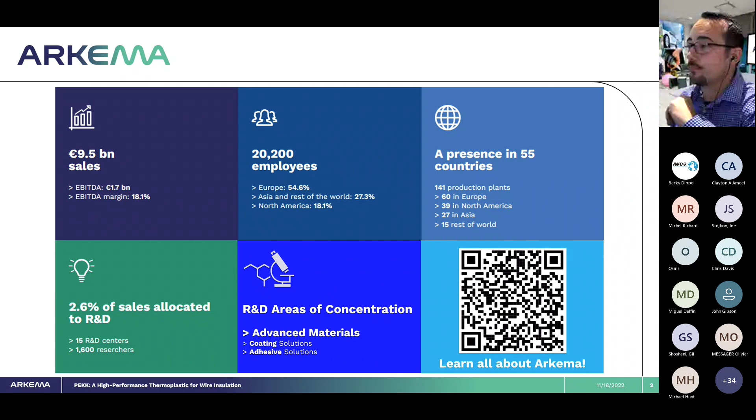So I am part of the high performance polymers division, and this is essentially our portfolio. We span the range of elastomeric materials to crystalline, amorphous, and semi-crystalline polymers. Kynar PVDF is very common in this industry, I'm sure many of you have heard of that.

It's an excellent material for environmental resistance, UV resistance, flame retardancy, as well as processability, durability, and strength. Rilsan is our polyamide 11, which is 100% bio-derived, inherently bio-derived, an engineering grade material derived from castor bean oil, which is really interesting. Incredibly lightweight, tough, and also has great chemical resistance.

Similar to that, we have our PEBAX, which is polyether block amide. It's a thermoplastic elastomer, used in everything from shoes to medical devices. It's light, tough, and has great energy return when we think about elastomeric material.

But my focus today is going to be on PEKK, or what we call Kepstan, and this is what we call our ultra performance material, right? It sits at the top of the pyramid of end use applications for polymers. This is when you have high temperature requirements plus high strength requirements plus chemical resistance requirements, high wear requirements or tribological performance. That's where a material like PEKK comes in as an ideal solution.

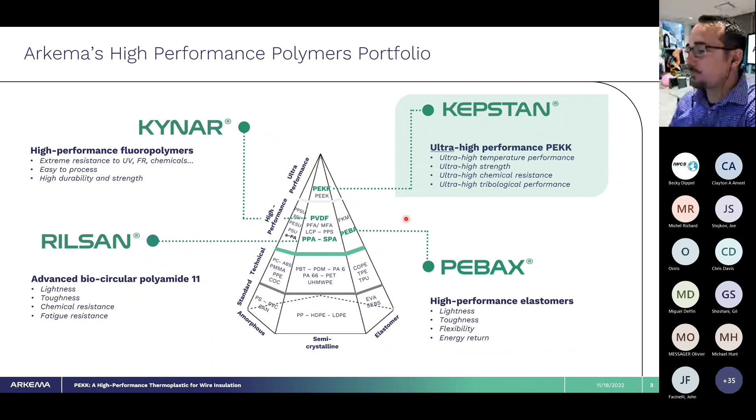So all around, this is an excellent polymer for a number of reasons, and I'll kind of walk around this circle a little bit. High temperature performance, so continuous use temperatures in the order of 260 degrees C, upwards of 300 degrees C for transient use. It's high stiffness, 3.9 or so GPa, high strength, great wear properties for things like powder coating or wire coating when you're worried about abrasion resistance.

It's inherently FST compatible. This is a material used in aerospace and defense, which obviously has very high restrictions on flammability, in terms of heat release, toxicity, and smoke, as well as V0 burn data.

Excellent chemical resistance, inert to most chemicals, everything except for maybe fuming sulfuric acid, right? So everything from solvents, bases, and general acids.

I'll talk about the electrical properties, the dielectric constant for this material at both room temperature and high temperature. Performs exceptionally well in that space. Excellent barrier to various gases, whether it's hydrogen sulfide or carbon dioxide.

And then finally, one of the keys to our material is the fact that we have tunable crystallinity. I'll talk about the PAEK materials as a whole and where PEKK fits into that, and how we have this tunable crystallinity. What that tunable crystallinity does is bring us into the world of having a variety of processing options where we can control the melt temperature as well as the crystallization rate.

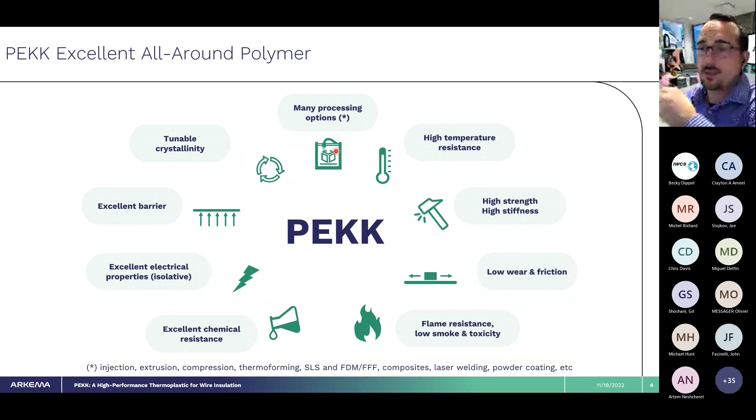Okay, so as far as wire coating, this is going to be a high performance wire coating, if you need this combination of properties in one jacket for your material, right? So that's high temperature resistance, overall high performance, the high dielectric constant at temperature. You have an aggressive environment, temperature plus wear plus chemicals, and then it's compatible with extruding coating processes, so it's processable on a variety of different existing lines for your application.

And so some of the spaces that we're looking at and exploring, which could be of use, that's going to be oil and gas, electric submersible pumps, downhole applications where these environments are hot and aggressive, or even coming applications in e-mobility or electric vehicles where magnet wire for the next generation of electric motors, where we're trying to densify motors, get higher voltages through them, higher temperature requirements, plus compatibility with whatever lubricants and things might be in these motors.

So I spoke high level as to what PEKK is as a material. Now I'll scare everybody with a little bit of organic chemistry, right? Very high level. I don't know the last time you had to look at a molecular structure of a polymer, but here you go.

So what is PEKK? PEKK falls into a class of polymers called polyaryletherketones, and what that refers to is essentially just the backbone of the polymer. What comprises this material? You have an aryl group, you have an ether linkage, and then you have a ketone linkage, right? And in the PAEK family, what you do is you can alter the ratio of these and the structure of these to get a variety of different properties.

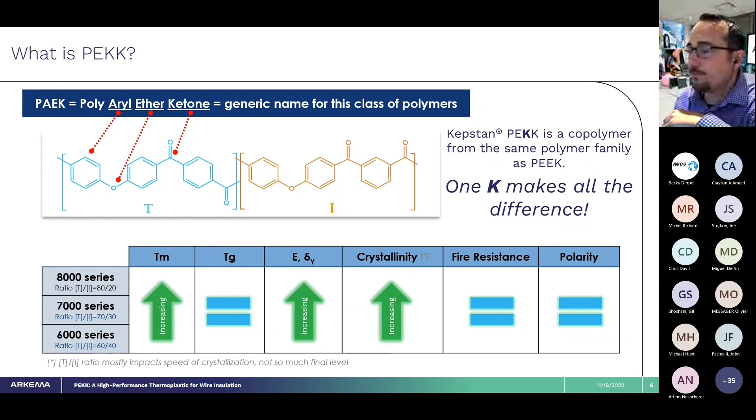So, where does PEKK sit versus some other PAEK materials? I'm just going to talk high level about the temperature profile. Because we have a higher ketone content, we're going to, in general, have a higher glass transition temperature. In our 8000 series, we're looking at about 165 degrees Celsius, and the 6000, it's only a few degrees different, at 160 degrees Celsius. This will drive the mechanical properties and the temperature at which you can operate the material, but you also see that translates into electrical properties as well, in dielectric constant, which I'll show in another slide.

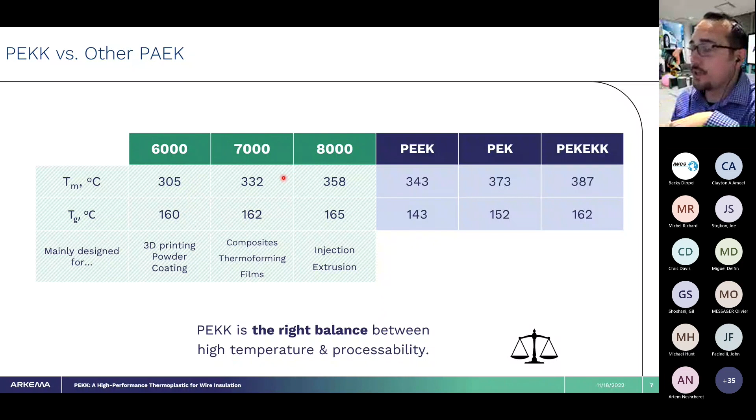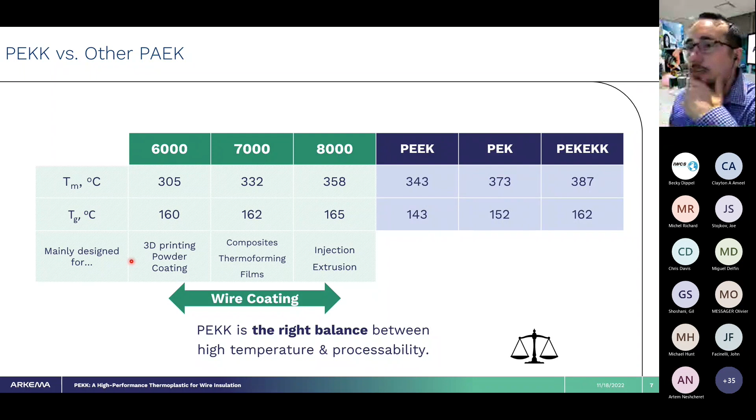Of these PAEK materials, it becomes an alphabet soup of E's and K's, but you've got PEEK, which is very common, and I'm sure many of you have seen that material before. Then we've got PEK, which is ether ketone, and then you've got EK, EKK - just flip-flopping depending on how many ketones are in these. As you have more Ks, the melt temperature will go up and the glass transition temperature will go up. But in the case of PEKK, our material, you have the ability to tune that and retain a lower melt temperature while still keeping the higher Tg. That's one of the big differences here for us. In the case of wire coating, depending on how you're doing your coating, all these grades are adjustable, whether it's powder coating or extrusion, depending on the end application.

Things like powder coating or 3D printing, especially where you have large parts being formed in a layer, you have to really control the kinetics of crystallization in order to either control it or prevent it entirely. The same can be true for wire coating.

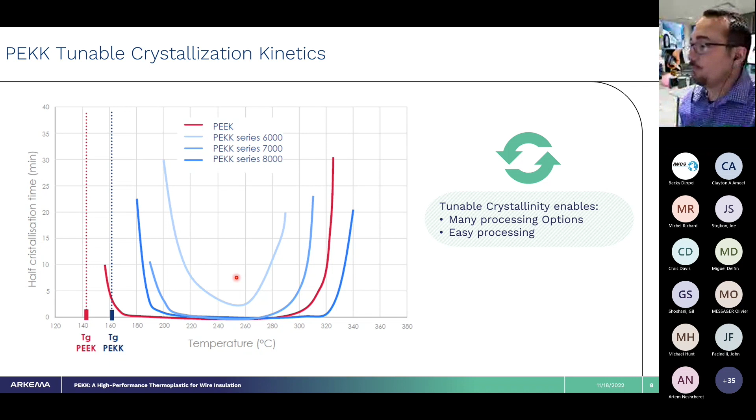Because of this, a variety of processing is available for this material, everything from extrusion all the way to powder coating—everything from bulk processing to thin film processing. I won't spend much time on any of these today since we're just going to be talking about wire and the material as a whole, but we could certainly do a deep dive on some of the different applications. The beauty I want to point out about PEKK is the ability to control the crystallization and melt temperature, which allows us to address a variety of these different processes with this material.

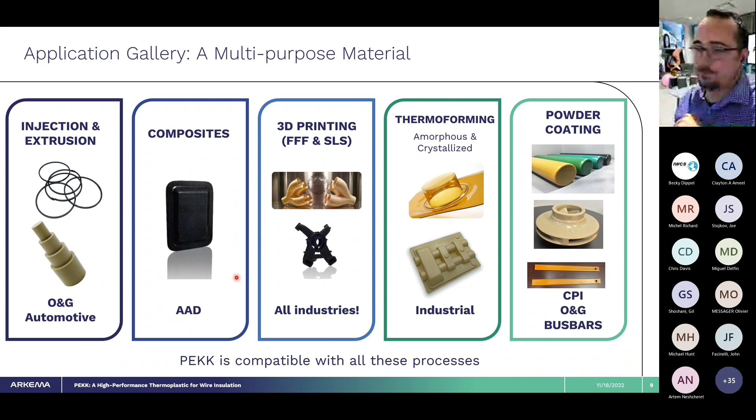I'll start to dive into some specific properties about PEKK, and the last ones I'll touch on will be electrical, so you'll have to wait for that. What I'll talk about here is mechanical performance, straight tensile properties as a whole, comparing this to PEEK, a very common PAEK material used in a variety of applications. I'm sure, as I said earlier, you've heard about that one.

What you've got on the left is the tensile strength, and on the right is the tensile modulus. The key thing here is we're looking at elevated temperature performance of these materials—both charts go from 130 to 170 degrees C. Due to the extra ketone in the polymer and that higher Tg, we're seeing a higher tensile strength at temperatures. So at temperatures of 130 to 160 degrees C, you're seeing a higher tensile strength for the PEKK material. For these extreme applications we're talking about, you're going to have a higher strength.

The same thing is true for the tensile modulus. At about the 160 mark or so, you're going to see the PEEK dropping, while the PEKK is going to retain its modulus for a longer duration at those higher temperatures. Again, because of that high temperature performance of the material, we're going to retain these properties.

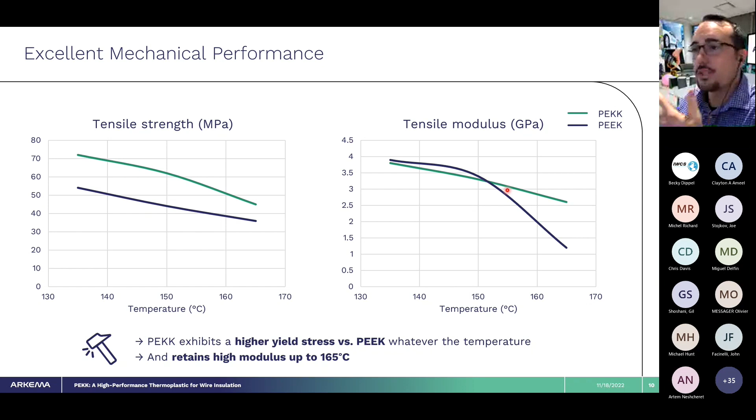The same thing is true for creep resistance. This is creep resistance comparing injection molded PEEK to PEKK—this is our 8001 series, which has the higher ratio of T to I, so higher crystallinity, or faster crystallization, excuse me. We've got PEEK and PEKK at both 135 degrees C and 50 MPa, and then 150 degrees C and 35 MPa. What you're going to see is the same trend: for PEEK you see an increase in elongation or strain on the order of minutes, whereas for injection molding it pushes out further to about hours, and for the stock shape you see an even longer time.

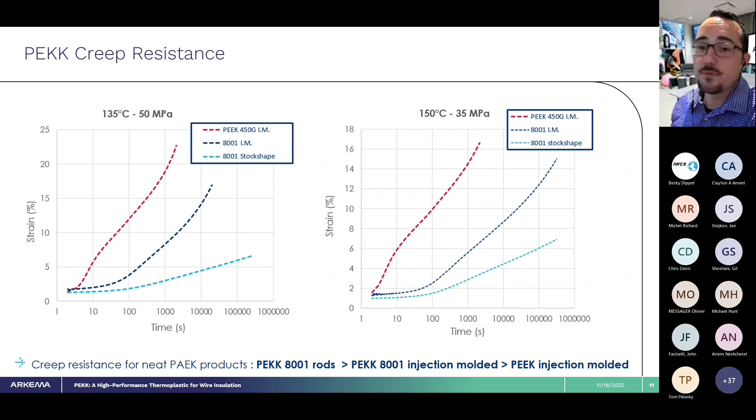The same trend is true—it's exaggerated a bit here for the 150 degrees C condition—where we have higher creep performance, consistent with our higher temperature stability versus some of the other PAEK materials.

This is the compressive strength and modulus of PEKK, again using machined stock shapes, compared against both PEKK rods and PEEK rods. We're going to see a similar trend here, about a 20% or so improvement over PEEK, and that's at room temperature.

This test is specifically at room temperature, machined samples out of stock shape, and you can see for PEKK in this column we have a modulus of about 3.9 GPa and a compressive strength of about 167 MPa. Whereas for PEEK, you see a modulus of about 3.2 GPa and a strength of about 140 MPa.

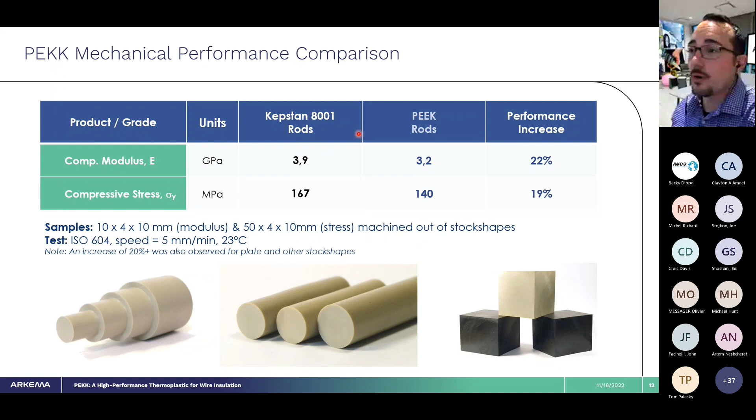Next, we'll talk about PEKK chemical resistance. This is environmental stress cracking resistance of both amorphous and semicrystalline PEKK. It's important that you understand there's going to be a difference between amorphous and semicrystalline. So what we did was a 1 week immersion at room temperature of the semicrystalline and amorphous PEKK.

You'll see this is going to be a spider chart, where 1 means dissolved, and a 10 means there's no effect on the material after a week of soaking. Then there's kind of a gradient in between, where number 4 is swelling and number 7 is ESC after a few days.

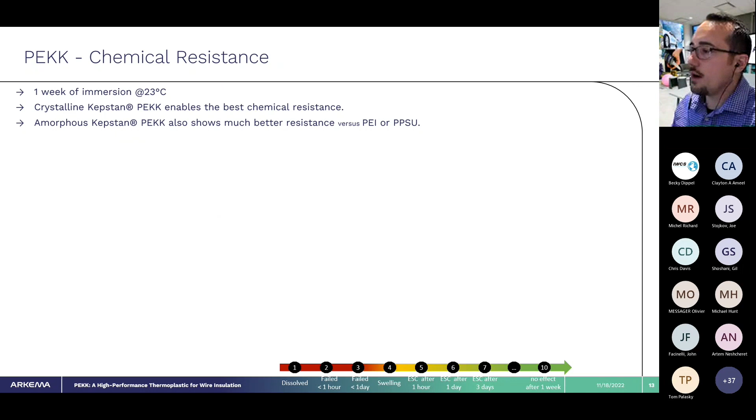On the left, you'll see a comparison of amorphous PEKK, semicrystalline PEKK, PPSU, and PEI against some very common chemicals used in the aerospace and defense industry or the oil and gas industry. You've got a quaternary ammonium disinfectant, ethanol, jet fuel, Skydrol, which is a common hydraulic fluid, and then some aggressive solvents like toluene, MEK, and trichloroethane.

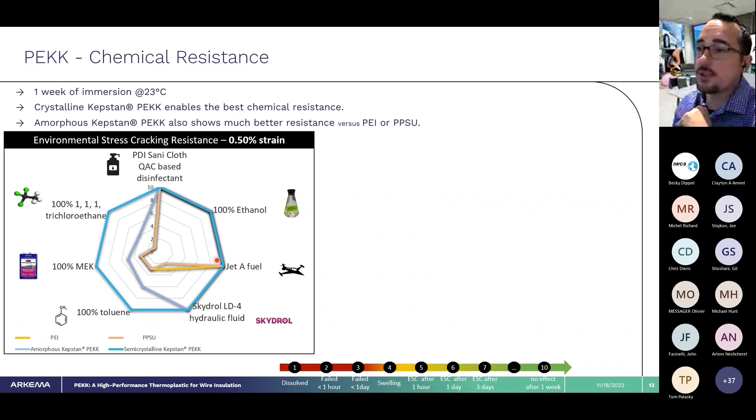The brightish blue line is our semicrystalline or annealed PEKK, and what you can see is it's essentially unaffected by all these chemicals, which is fantastic. Comparing that to PEI and PPSU, some of the chemicals that are attacking or essentially dissolving these materials do not affect semicrystalline PEKK. This is at a 0.5% strain, and I also have it at 1.1% strain.

The thing to point out is we are comparing amorphous PEKK as well, and what you can see is the amorphous PEKK still does better than the PEI and still does better than the PPSU, but it of course will underperform the semicrystalline PEKK. This is a completely expected result, no surprise, but it shows that depending on your processing and your application, we have the flexibility to have a material that might fit for you.

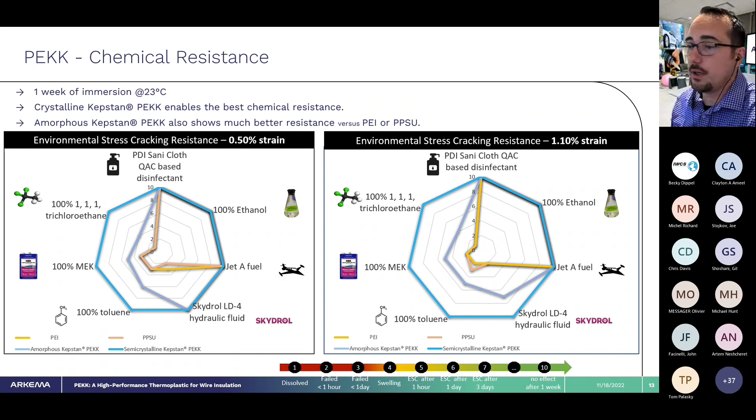In that same realm of environmental resistance and chemical resistance, we have done NORSOK testing. The NORSOK testing is very common in oil and gas for downhole conditions. The acceptance criteria for this exposure test is a limit of plus or minus 5% on swelling. The tensile strength, elongation, and modulus cannot change by more than 50%, and there can be no visual deformation. That's the characteristic of the polymer going through the test.

Now, the test itself is going to be an exposure test of hydrocarbons, sour gas, and water, where sour gas is comprised of carbon dioxide, hydrogen sulfide, and methane. The polymer is then exposed for 60 days at 100 bar at 3 different temperature conditions: 200, 210, and 220 degrees C. So this is a really aggressive test, where we're combining a variety of different treatments or exposures - temperature, pressure, and chemical all attacking this polymer.

And what we find is that PEKK does incredibly well. This is the 220 degree C test, compared against a variety of other PAEK materials. We've got PEKK injection molded and extruded, and we're comparing to PEEK, which has also been extruded at 220 degrees C, tested at 200 degrees C, and then also the PAEK material I mentioned earlier, and PEK, another one of those PAEK materials.

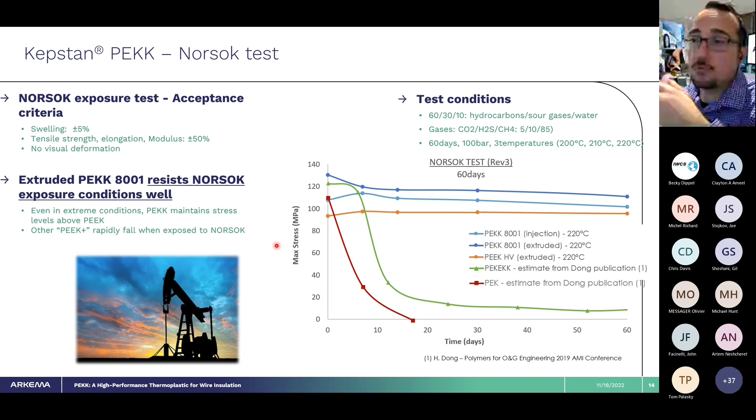What we see is that PEKK survives the entire life of the test, more or less unaffected, with only a very slight drop in tensile performance. It also exceeds the performance of the PEEK material, as we mentioned earlier comparing some of the room temperature and standard test data. PEK and PEKEKK clearly have a sharp drop off in their performance after only about 2 weeks. So as we look at applications for extreme conditions where PEKK may be useful, clearly oil and gas downhole conditions are an area where we can survive and bring value to folks.

I'll only talk briefly on this one. This is a bit of an eye chart, but what I'm showing you is we've done a lot of flame testing on this material. This is an improved material and does exceptionally well. Inherently, there aren't additives put into this material to make it FST - PEKK as a material has these properties on its own. You can see the V0 test, the OSU, low OSU, high oxygen content, oxygen index. And when you burn it, you get carbon monoxide and carbon dioxide, which is expected based on the chemistry I showed you. So that's fantastic for hazardous applications.

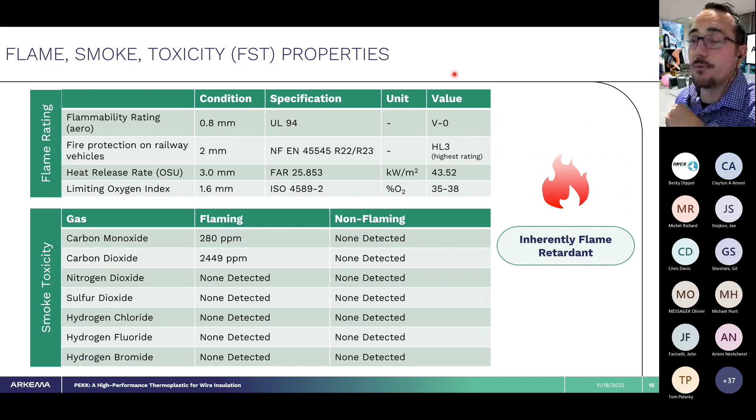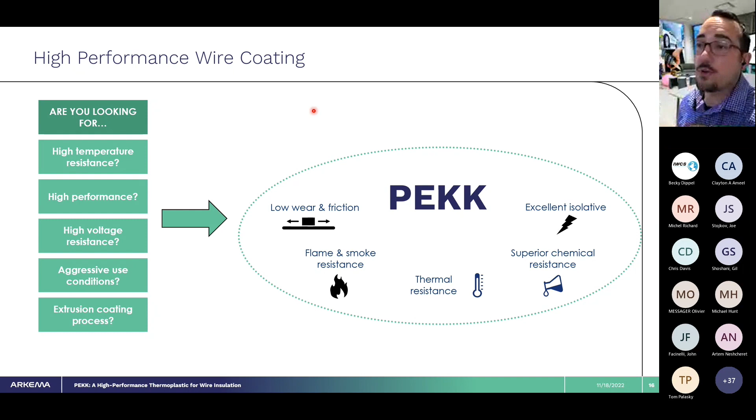As I said, I did promise I'd show some electrical data as well. So just reminding you, all the benefits I've shown you previously - mechanical performance, chemical performance, thermal performance - all combine into PEKK to make it a great material. In order to become a wire coating material, we have to know: does it actually perform well in electrical testing? I'll show you both dielectric constant of the material and dielectric strength, and we can go from there.

What I've got here is the dielectric constant, and like some of the other data I showed you before, this goes from room temperature all the way up through hot performance. The black or darker blue line is our PEKK material, tested at 40 hertz. We have other test data - 60 hertz, 1000 hertz - which I could show at a later date. But just comparing PEKK at 40 hertz to PEEK material also at 40 hertz, at room temperature we're close, a little bit better, but really the big difference is at elevated temperatures. You can't see it that well in this chart, but there's actually a point around 150 to 180 degrees C where we have a lower dielectric constant. We almost intersect at about 190, but once you get above 200 degrees C, we retain that lower dielectric constant for extended temperatures. So in hot and aggressive environments, PEKK really is a great material.

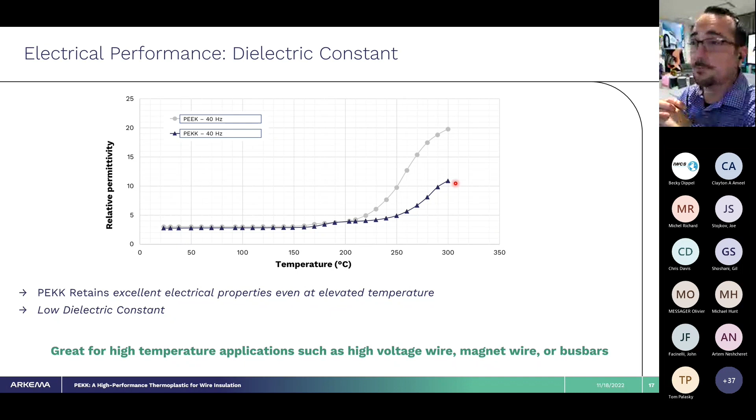To take that a step further, the dielectric strength - obviously a higher dielectric strength here is better, versus a low dielectric constant being better, which you all probably know better than I do. Again we're comparing up through elevated temperatures, the PEKK material to a common industry material. The thickness for these would be about 160 microns. You can see the same pattern we've seen consistently throughout a lot of the performance data - as we approach 150 to 160 degrees C, the performance of PEKK continues to outperform the PEEK material due to the higher thermal characteristics of PEKK. Our dielectric strength from 200 to 250 degrees C is clearly much higher than PEEK will be at these temperatures. So looking at that data, these are great.

This is a great material for high voltage applications where the voltage itself is bringing temperature, or environments where you're going to be aggressive, hot, and have chemical attack. So high voltage wire, magnet wire for next gen E motors, which I'll talk about a little bit, as well as busbar coatings for EVs, where you're going to have a lot of current running through these materials, and you're also worried about safety effects such as thermal runaway.

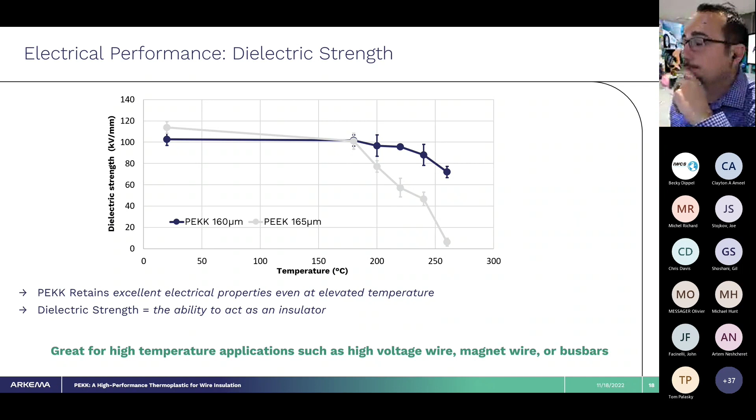Briefly, I mentioned we have this additional benefit of having higher polarity, being a PEKK, additional ketone. What we're showing here is a rough test on over-molding PEEK versus PEKK onto a bare metal substrate - no primer here, to ensure good adhesion is just from the two materials themselves, on a clean, properly prepared metal surface. What you see is about a 2x increase in PEKK over PEEK in the adhesion test. In the PEEK material, we're seeing interface separation, which means the polymer is peeling off of the bare metal substrate. In the case of PEKK, we are seeing interface separation, but we're also seeing polymer deformation and some metal deformation, which means we've really got a nice bond to that metal - so very good bonds to the substrate.

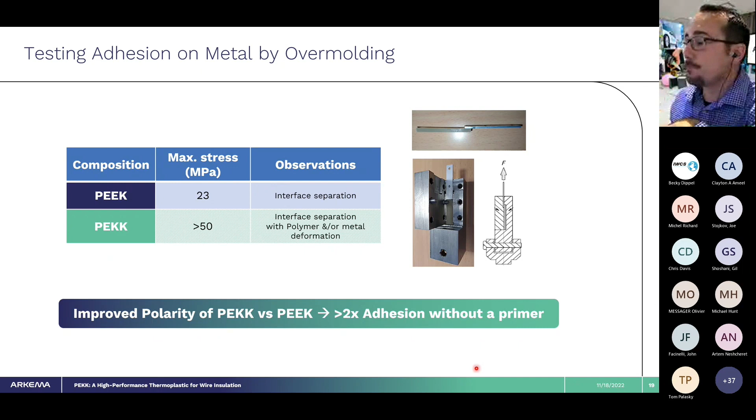I'll talk at a high level about potential applications in electric vehicles. One we're looking at right now is thermoplastic wire insulation for magnet wire. Versus classic thermoset enamels, we've got a much lower dielectric constant, especially at temperature, as we've shown. And you'd be moving to an extrusion process, so you can remove some of the cost of solvent processing from the traditional enamel coating. This makes sense as motors densify, which drives potential voltages higher, and of course operational temperatures higher, to 180 to 220 degrees C.

PEKK lends itself well as an insulation material for those magnet wires. The higher polarity gives you better adhesion to those wires. And we also have this unique benefit in terms of a potting material.

Because we have control over the amorphous and semicrystalline behavior of the PEKK material, we can get layers to bond by taking them through anneal. So if you put two amorphous pieces of PEKK together, you can get adhesion by annealing them together as it crystallizes. This has really been beneficial for us in 3D printing or powder coating, where you're building up layers to create your final part. It could be beneficial for potting for electrical applications as well.

And again, as mentioned, we've got the improved dielectric performance, which will drive things like PDIV and insulation properties in general.

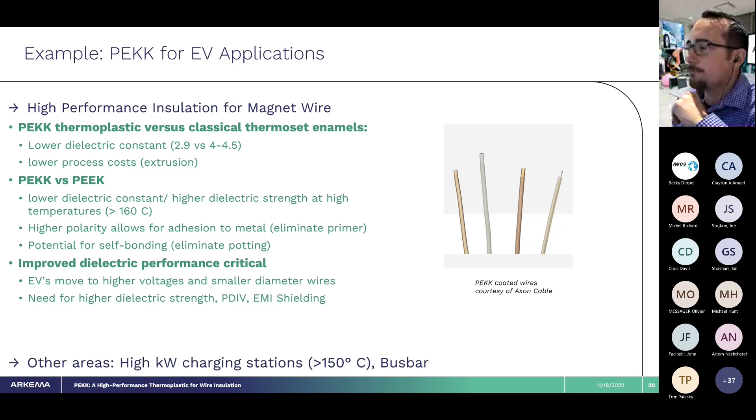The last thing I'll leave you with is very general, because it dives into the world of next gen materials for us, so it's a bit proprietary. I won't tell you what these are, but I will say we have the ability to alloy this material. PEKK blends well with a variety of high performance materials, and right now we're working on two specifically.

The first one is a material to push thermal properties even hotter. We've been able to show an increase of about 15 to 25 degrees C for the TG, as well as shifting out further the rise in dielectric constant as you increase temperature. So dielectric constant stays lower as you increase temperature with this alloy we're creating.

We can also increase the flexibility, dropping the stiffness, decreasing the overall tensile strength, but increasing the elongation at break. So some more flexibility as we look at a variety of applications involving wrapping or winding wires and things like that.

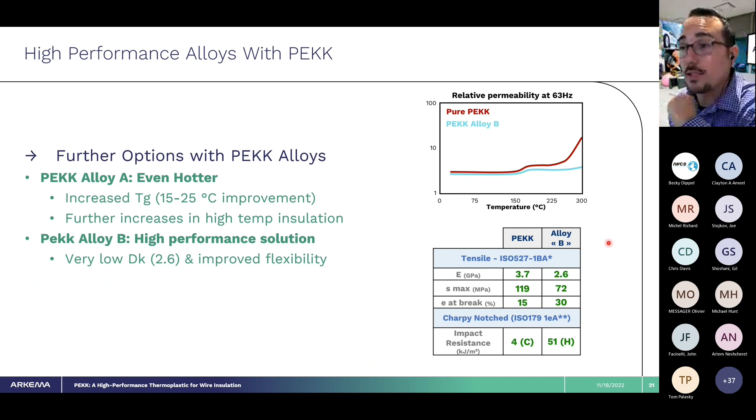So in summary, that's the technical side of all this. As a product, PEKK is available in a variety of different formats. We make it directly as flake or a rice-type material. It's also available as pellets and powders, so depending on powder coating or extrusion processes, you can use this material. We've got glass filled, carbon filled, as well as a variety of wear grades.

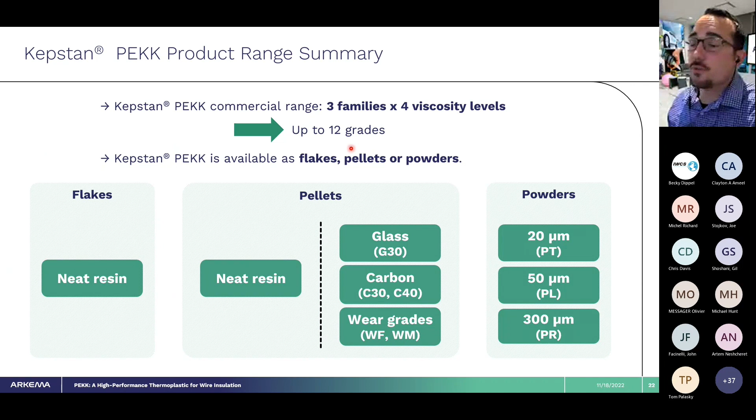The last piece is we offer this in 12 grades relative to viscosity. We've got the 6, 7, and 8,000 series, which controls the melt temperature and crystallization kinetics. We've also got a variety of viscosity levels depending on process conditions, and the 6004 series will have a much higher flow rate at temperature, which is great for compatible resins.